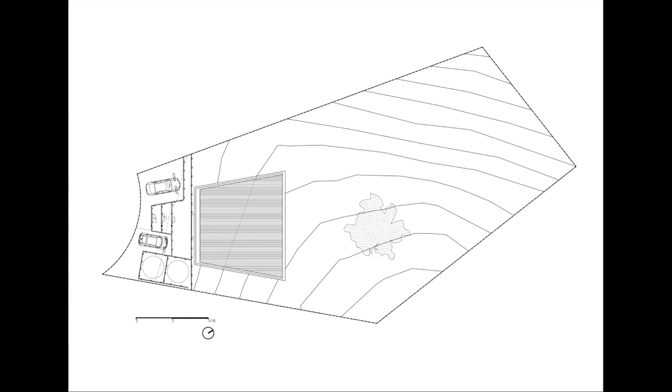The orientation was the key thing for the development of the plan. The predominant winds are from the southwest, so north is here, southwesterly winds coming in through here. If you can get out of those southwesterly winds, which are probably about 75% of the time, you're very comfortable down there. So we located the butt of the building into the southwest, hunkering the back of it there to shelter from the wind, and opening up to the northeast. The other advantage is from a solar orientation point of view, northeast is your ideal orientation - you've got your northerly aspect, but also early morning sun preference, and by the time it's getting past noon you're starting to shade yourself. So from a solar orientation it was ideal, and from the wind it was also a perfect match.

The other thing about this house, and probably my favourite thing about it, is it's a real Pandora's box in a way. It's a 4-bedroom house in under 100 square metres. It's a very finely worked out plan, very minimal sized bedrooms, but again it's just that idea of needing somewhere to stay for the weekend - come and get some bunks, put your bag on the floor, and then it's easy to pack up and go. So the house is about 100 square metres, and the outdoor deck is about 20 square metres.

So a large part of the plan is actually this covered outdoor deck. The other way we conceived of that deck space was not as indoor-outdoor flow - you know, that term where you've got big sliding doors and open to the outside. We really tried not to do that, because with a small plan we're actually trying to create lots of different smaller spaces underneath that larger ceiling. So we've created almost like a screen between them with a series of double doors, and that creates a very separate space in that covered deck area.

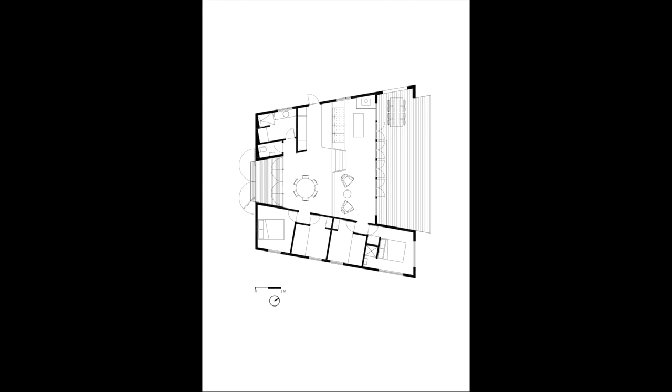This is a really successful house for having 18 to 20 people around, 4 different groups doing things, kids everywhere, some people having quiet time, all within this very small package.

To enhance that separation of space, it steps down as the land steps down. So from the street, from the cul-de-sac, that's all you see of it. You basically don't see anything. It's locked up with big gates. There's a recessed entry where you can hose the dog down and chuck your wetsuit, and then you get into the house proper.

So that's down into the front entry. And then that's from the south, the other side. So we're looking at it from the northwest direction.

We just stepped the decks down and the levels to the maximum height legally allowed without a balustrade. So it is quite dangerous for small kids, but apparently the Building Code of Australia says not dangerous enough to be concerned, so I was okay about that. And it also just removes any obstruction of balustrades from your view.

That's from the main face. And then from the side, it's got just this, it's a really simple construction. It's one of those jobs that had a very limited budget. It's maximum volume, minimal detail to it. The cladding is a silvertop ash cladding. It's in a wildfire overlay area, so it's one of the 5 species that protects itself and weathers into the environment.

So inside, we've got a dining area stepping down to a living area, then out to the deck. As I say, quite a simple house inside, but incredibly efficient both in plan and in weekend use, being able to clean it and get out of there, and also for heating and cooling. So you just spend a lot of time down on that deck, you're always out of the wind. And it has a window in it, it feels like a room, it's got a very tall ceiling to it.

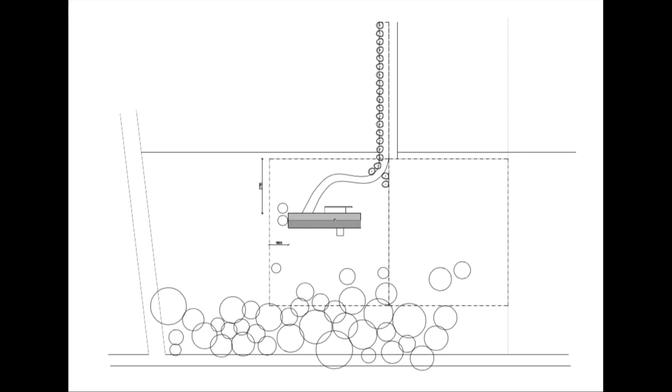So this is the house here. You drive in to the carport here. That's the northern orientation. There's some pretty ugly houses all around it now, and there's the trees.

So from here, we've got the main bedroom, an ensuite and wardrobe, a study, a kitchen area, a fireplace, 2 bedrooms, carport, and a workshop down here.

That's the northern elevation, so it's got a spotted gum cladding, which weathers and greys off over time. And the north-facing glass is about 2.7 metres high and has these large sliding screens on it. So in winter, a lot of heat gain onto the slate flooring, and in summer you can close it off and restrict the amount of heat gain you get through there.

There's those large screens. So with that simplicity, a lot of it was about the texture of the materials you're using - the stacked stone wall, the battened screens, and the cladding. Also, those screens cast a shadow onto the floor, especially in winter, which changes minute by minute as it sweeps across.

Very simple build for this - a plywood kitchen, slate flooring, and predominantly plasterboard, again just for ease of construction.

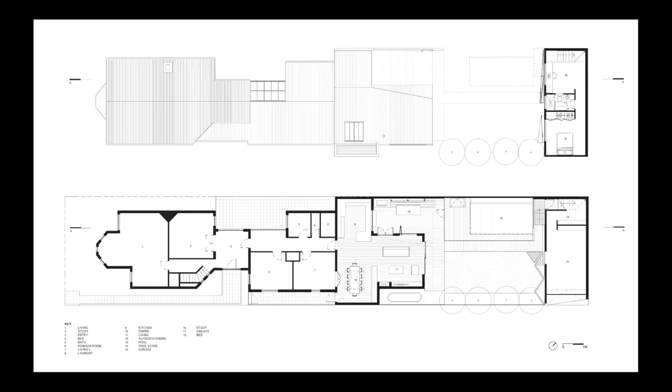It had a very tall, slender proportion on the street with this very weak, folded roof plane. So we used all that timber framing that's there, that subframe, and clad it with battens, bringing it as a heavy timber gable roof form. Frank Lloyd Wright's Oak Park House was the design reference for it, and that helped bring the volume down.

It really did change the appreciation that the neighbours had for the house and the street. When we were finishing this phase of the work, one of the neighbours came up to me and said, 'I love what you've done here. You've increased the value of all of our houses on the street,' which I thought was pretty high praise.

Once we got inside, we did a front-to-back scheme for the clients. The front rooms were the quieter, more formal rooms, and those would be the darker spaces in the house. We had quite a high level of contrast between the rooms at the front of the house and those at the back that faced onto the garden.

So these were the front rooms, the living area, facing out to the street. Again, quite private areas because they face onto the street, so not much connection there. There's a study that we put in, and then the rear yard.

We had a bit of fun with that two-storey structure out the back, making barn-like references for the structure. What's going to happen is these large triangular screens are going to be completely overgrown with three or four different creepers we've got coming up through there. That will extend the garden view up onto the vertical face, but also provide heat gain protection from the western sun as it hits that facade, providing a barrier there.

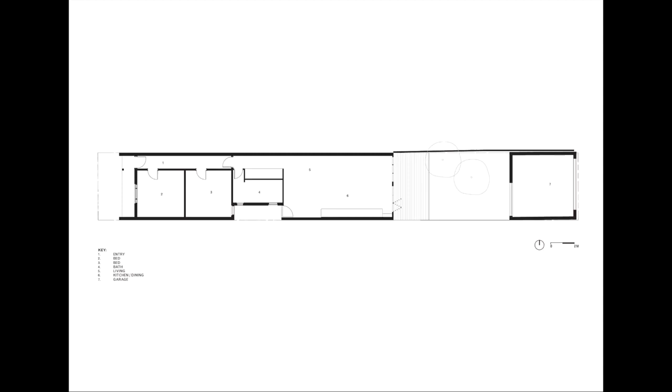So this is the existing house. This is the street, one bedroom, two bedroom, bathroom, living and dining and kitchen, and then the garage. And then this is our proposed plan. So that remains the same, and then this is this corridor.

We just had a little display space. There's a set of stairs which have got very long treads to them, and it's quite compressive, with an outdoor fireplace. Then there's a little play area, like a 450mm high bench where kids can get the Lego out and play there with some sun. Then there's a desk for working at home, and then the stairs.

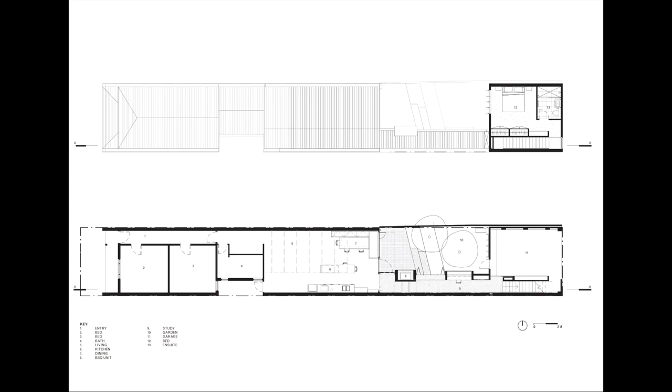Second storey. So we have to play with scale in this.

I mean, it's a small job, but it shouldn't necessarily look like it's just a small job. So we would do things like this: this barbecue enclosure is much higher, almost sculptural in what it's doing, which means that in a small scale job, you want somewhere for your eye to go to because you don't have a great view. So you want your eye to go to somewhere close by and in the mid-distance, and that gives you a greater sense of the space that you have around you.

We also combined these: it's the window to the upstairs area, and then we've used black reflective glass going into the garage space. So instead it reads like this enormous void space or a much larger black glass window, again because glass during the day is black, right? So there's that whole misapprehension about what glass is. Glass is not see-through, glass is black.

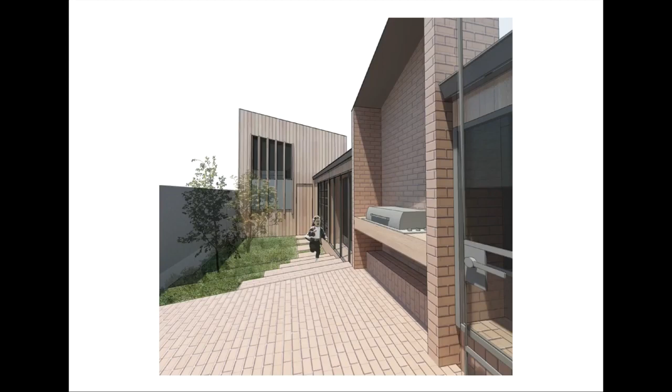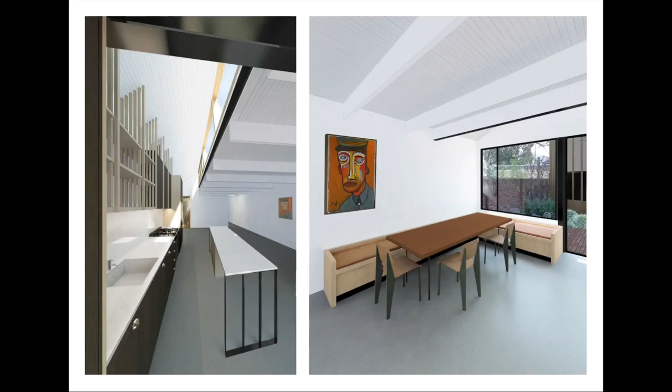And again, this is just sort of a basic render we did of that space, that study space through there and the steps. Building in a built-in seat, which again just saves a bit of space. The kitchen, which we're working on.

So that's it from the laneway.

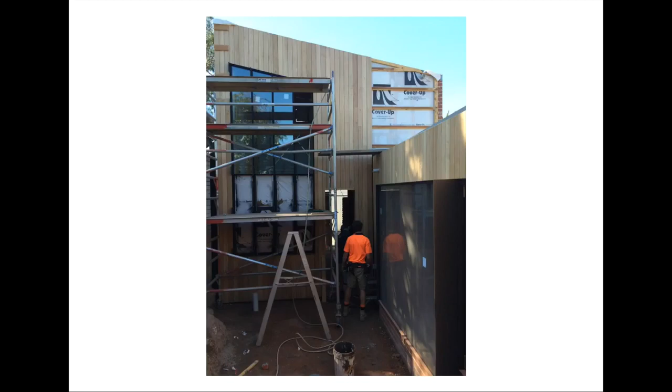And this is a construction shot. So you can get, that's about as good a photo as I can get, standing right back against the wall and getting a shot. You can see the scale of it. You see this guy here, he looks like a giant because of the way those windows and openings are mannered. So they're sort of overscaled. So without him as a point of reference, it actually feels like a larger space.

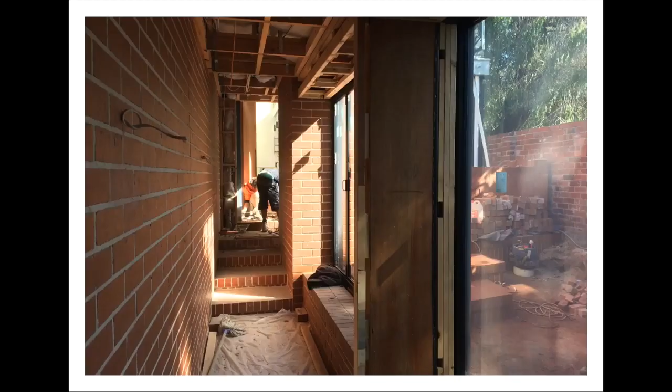And you're starting to get an idea. All that glazing is north facing, so again it's got some eave to it, it's got some overhang, but during the winter, sun's going to be coming in, hitting this wall. The corridor is then open to the main bedroom and the rest of the house, and that'll actually pull hot air through there at night. And there's the chimney element.

And just the material, it's always great with a small job like that, and the client's been really fantastic about just indulging us in the material in every decision that we make. So right down to the brick coursing there, you see we've done what's called a staggered bond, but instead of staggering it on the horizontal, we've staggered it on the vertical. So it's just all those things you can manipulate.

The next two jobs are now working within a suburban context, and I think it's really important to actually highlight this context because I personally don't think we see enough good examples of residential architecture coming out of a truly suburban context. Those two previous projects were in Carlton and St Kilda, and while they're great suburbs, they're not really a suburban context - they're really inner suburbs, very urban contexts. These two houses are out in Fairfield. They are much more in that suburban context of a single family house on a 600 square metre block, which is great.

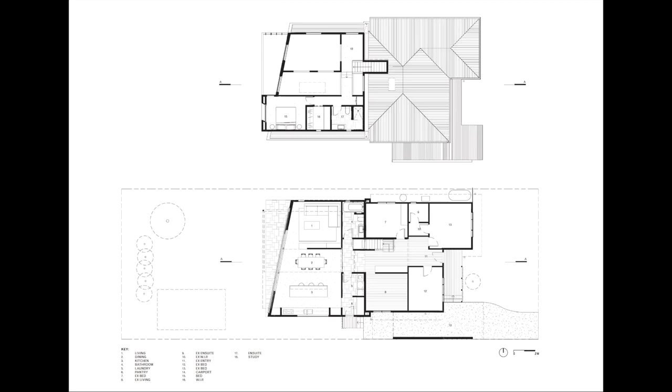The basic answer for that is you'd basically do the two-story box on the back. So that's what we did, but we added these voids and views through and openings, and we slightly kicked it out here to the north to get better orientation, providing big overhangs to the west for that late afternoon sun, and then provided a variety of spaces in what's actually quite tight plan spaces.

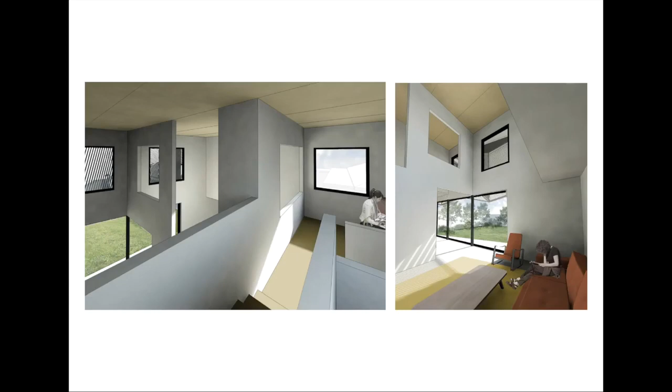So here we've got a living room, you've got a view outside, a high window here which is screened from sun, then openings through into the dining area. Upstairs you've got a study area with a bridge across, and again these views down into the living areas. So you get to play this game with views and light, family relations — like how you yell to each other or don't yell — and where you can hide away.

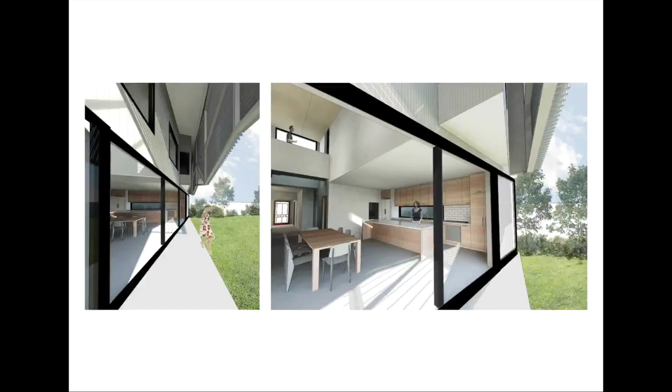There's just the plywood ceiling, so a fairly cost-effective way to add a bit of warmth in that horizontal plane. All the lighting is from uplighting, so you don't get light hitting the top of your head and a glare source from your light fixtures. The lights are located on the walls and bounce off the warm plywood ceiling. And when you get artificial light from one room bleeding into the other, windows leaking light, there's a very peculiar sense of the feeling of light in there.

The next house, and this is the last project I'm going to talk about, is the Fairfield Hacienda house.

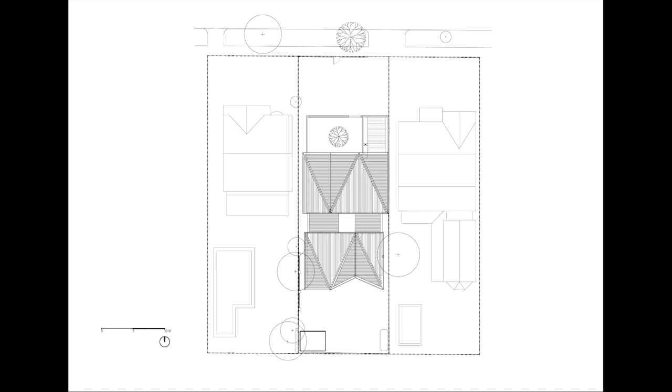So again, just flip it here. This is north here: an enclosed courtyard, a living area, kitchen and dining, carport to the side with the family entrance around here, kids' bedrooms to the side with their own living area, and the parents here, with a central courtyard.

This house, in plan—when Frank Lloyd Wright used to talk about his budget houses, they were always a 4-square house: a square plan with basically 4 rooms, which is how you build effectively. When he did expensive houses, they became central living spaces with wings to either side—that was his sort of two plan types. In a way, this kind of combines the two: imagine a central living space with a kids' wing here and a main bedroom wing here, wrapping around that central courtyard.

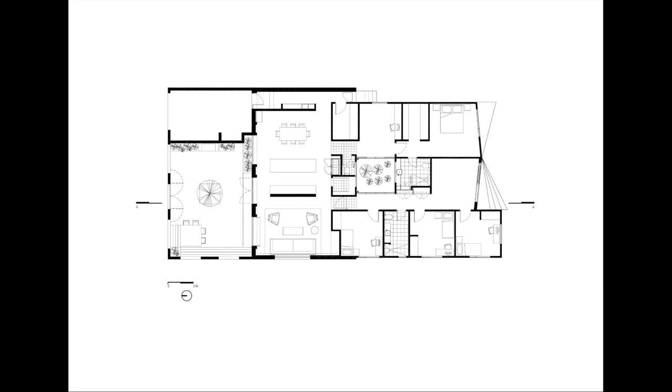So that's the view in. There's concrete block predominantly for the walls, up to 2.4 metres high, and that concrete block goes from the outside of the courtyard to the interior walls. The importance of that is that the courtyard space needed to feel like a roofless room—it couldn't just feel like you brought your front fence in a bit. It had to feel more permanent, like it was more part of the house. So by closing the concrete block walls and continuing that inside, it reinforced that impression.

So this is what I'm saying—from the street, these clients were very concerned about living on the street for a long time. Their brief to me was that it was not to be two-storey, because people didn't like two-storey on the street. It had to be single-storey. We comply with that setback, and we reference those hip and gable roof forms found in the area, but we create this interface with the street.

And then this becomes this fabulous space that gets lots of natural light. You know what it's like when you go past a brick wall on a late summer evening and you can feel the heat radiating onto the side of your face—that's what you get here. You sit there with your back against it and feel the warmth.

It becomes a space that contains a lot of activities—you can have dinner out there, go out and have a cup of coffee and read the paper, the kids can play there. The other thing it does is that the al fresco dining area now happens at the front of the house. The backyard is just for kicking the footy round, right? So there's no trying to blur those two things together.

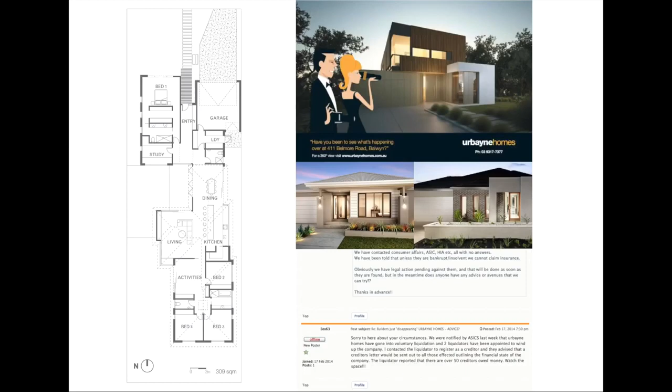And so the orientation was bad. Size was very large. So again, a very large house for the money, because they had default bedroom sizes and living areas which were larger than you need to be, which is why the Australian house is one of the largest houses in the world at the moment - like grossly oversized.

As you can imagine, you have to treat this delicately. When somebody comes to you and says, we can get this 300 square metre house for $550,000, but we'd like you to do a better job, it was quite a process to say, okay, we're going to face you to the street so all your neighbours can see you, and we're going to reduce the area by a third. It took a while to talk about that, but they were very open to it, very good about understanding why we were doing those things.

This is the design build plan. I've identified here those shaded areas, area that we took out of their plan to arrive at this plan.

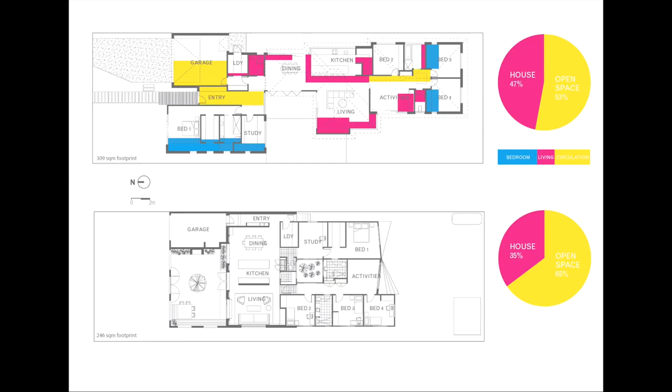Thinking about it, what was happening here is that the front of the house, that main bedroom, what it was looking onto, and the driveway, was kind of a public interface between the street and the house. The public don't necessarily go there, but it's a visual connection, and that's the relationship they have with the house. The backyard is in yellow, that's private, just for the occupants, and the blue is the house itself. What we did here is we've really created a sort of semi-public space in that covered courtyard, that open courtyard.

It was always an intention, like I explained, that the clients were very concerned about staying in the neighbourhood for a long time and becoming part of that neighbourhood. We thought it might be that if they sort of lived a bit in the neighbourhood, they could make a connection to it. That was kind of, I guess, a grand gesture, but one that's been incredibly successful.

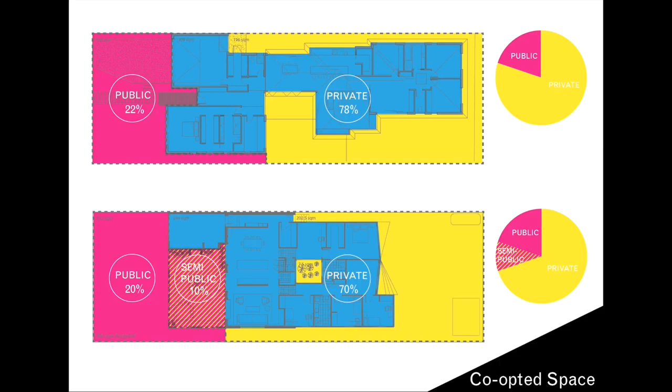So I started thinking about what that space was, and I came up with this idea that it's co-opted space. The definition of co-opt is to adopt for one's use, or to take over or appropriate. So what was happening here is that the Fairfield Hacienda was almost giving over part of its house to the neighbourhood. It was creating this blurred zone that wasn't necessarily the house's and wasn't necessarily the neighbourhood's or the street's, but there was a sharing going on. It was kind of a generosity that occurred.

There are sort of two instances where I see this happening. One is where a space is intentionally given over to others, which is I think what happened at Fairfield. And another is when space is intentionally taken over by others.

A great example of where it's taken over by others is the community gardens that I was aware of in the East Village in New York when I was living there. During the 80s, a lot of tenements that were in very bad repair were demolished by their owners for insurance purposes and left as vacant lots. They literally were just breeding rats, and homeless people would live there. In a lot of streets, the street would get together and take over that lot and build a garden there, and they would all look after it and use it.